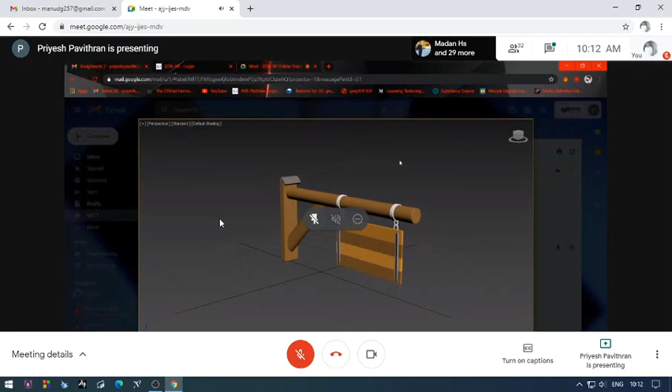Like Jananda, appearance wise it is looking good. The correction I'll suggest is this metal bar which holds the panel should move towards this side, or you can select all this part and squish it a little bit inside. The length is fine. Also this bottom part, I can see it here, I think while doing the loop it might have got some overlapping, but appearance wise it's looking good. Also the color combination you have given is fine.

Okay sir, nice, thank you. I will make one up. Yeah yeah, thank you sir.

Now Mithun. It's looking good, I'll say that at first.

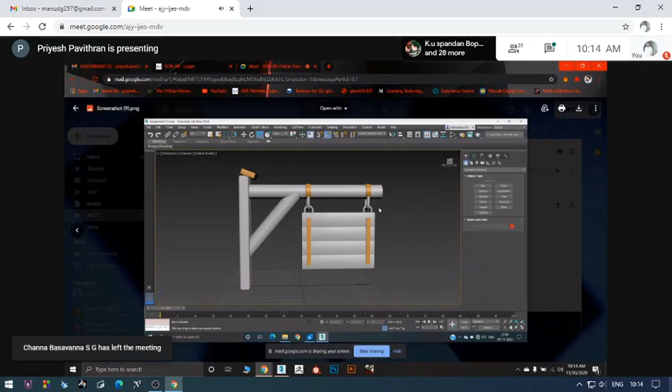Things you have to notice are the dimensions. Like the reference I have given you, this part is not this spacious here, so decrease the space from here to here and keep it somewhere here. The length of this cylinder should be till here, and this complete board should move towards this side. Also the remaining is under the grid, that's fine, the board looks fine, no problem. This holder is a little bit big, reduce the size a little bit smaller, then it will look perfect. Nice work, Mithun.

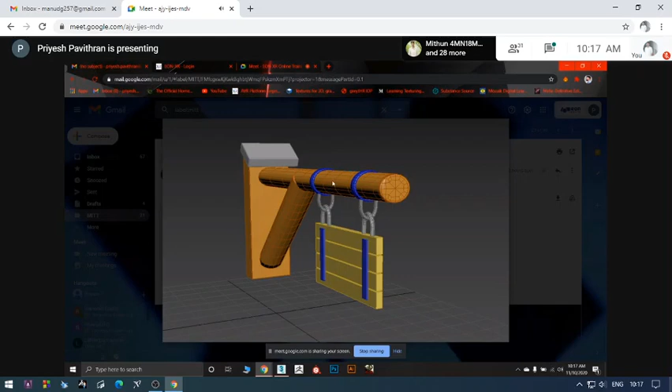Okay, this part is a little bit outside, so move it inside. Reduce the thickness of this plane and this box here. Also the same thing, reduce these holders' size, not much, a little bit. I can't find any chamfer here, apply chamfer, make it curvy at the end for this part. And this looks oval to me, make it circular, just scale it towards the vertical, I mean Z axis, you can scale a little bit, and the proportion is fine. Nice try, Sai Teja.

Now Rahul, wood frame - it's not a wood frame actually, it's a signboard, you can call it an ancient signboard.

This also looking fine to me, except this chamfer you have missed, so chamfer the edges, it will look good then. Also reduce the size of these holders, you can refer the reference itself, compare both your work and the reference, then you will get to know the difference between them, try to work accordingly. You can increase this side's plane size a little bit. Also the holder you have to reduce the size, and this looks okay, this is also fine, and this is too big, this part is too big, reduce that also. The proportion is fine, and the color combination also looks okay. That's all the corrections. Nice try.

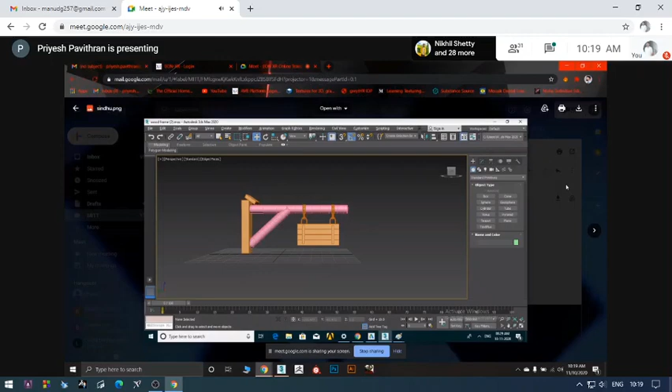So that's all the corrections. Nice try, Sindhushri. No problem at all.

Okay, it's looking fine. This part should be a little bit thicker, and these two parts are a problem because they are outside. So you can use the same slice tool - just drag this part till here and slide it, the same for here also.

So you do that, and you have missed the chamfer part here. For the connectors, you have to apply chamfer here a little bit, for both, or just do for one, and you can copy it here also. Reduce the size of this a little bit, not much, and increase the size of this signboard. Remaining all,

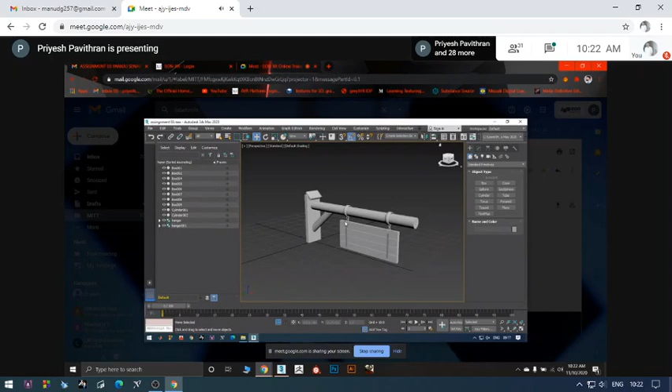And the holders, holders is fine, but very tiny. But it's okay, it's looking fine. Also, this part I can see it came out a little bit. Fix that also. Remaining all, it's looking nice. Nice try, Pankaj.

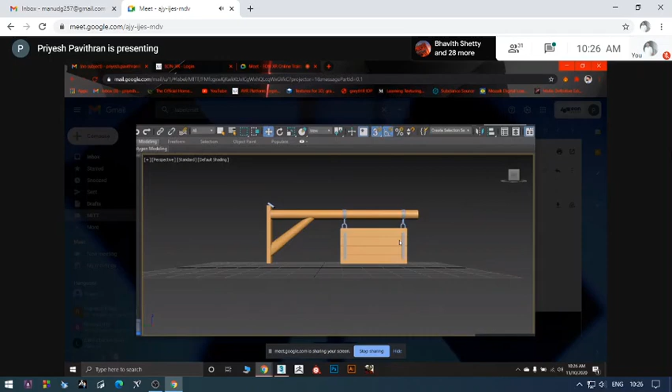Now, Madan, let's see. Okay, appearance wise, it's looking good. The color combination you gave is nice, metallic and wood.

That looks great. Also, some changes here, you have missed the chamfer part. Apply the chamfer, make it a little bit smoother, and also increase the size of this signboard a little bit vertically. Okay, that's all, nothing much in this. Also apply chamfer for this part also because it works, so do that also. I think it's fine. Nice one, Madan.

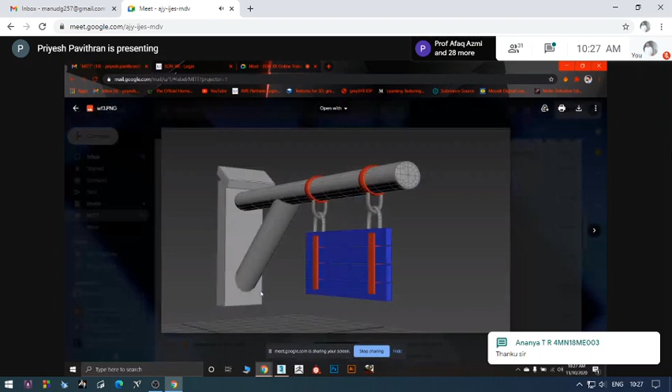Nandan, appearance wise it's looking good, but some problem here with the holders. The holders are very thin. I don't think these holders can just grab the weight of this part. It might break because it's very thin. So just increase the radius, I mean thickness of these holders. Then, remaining the proportion, decrease the distance from here also. Cut this much part and cap it down part.

Here you have done well, here also you've done almost well. It's looking good. Also it might look slightly bulky, but it's not a big deal. Also this chamfer is not looking that great. I think you have selected all sides and chamfered it, that's why it's looking like that. No issues, you can create it again. You can just place one box here and just do the edge, just chamfer the edges from this ring sides. So that's all, nice try, Nandan.

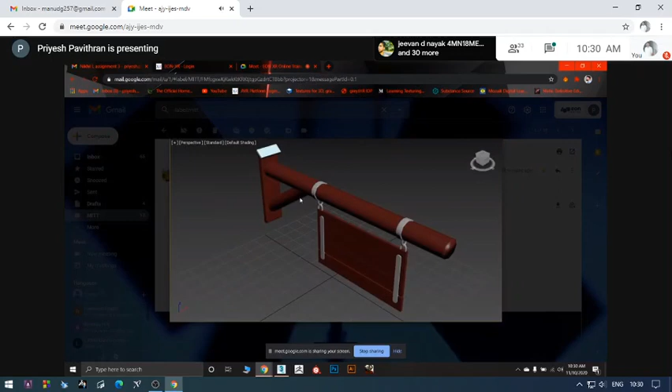It's looking nice. Now I want just major changes for this. You have to move this till here and this till here. Make sure it is parallel, almost middle to this part. This side also we can say it's feasible because once you have stuck it to the wall or something, it won't be an issue. So this proportion wise, it's looking fine. Also, you have sliced it, I guess, yeah, and you have done that chamfer also.

Okay, nice one, what was that? Nikhil, nice one, just work on these changes. Just move this till here and move this till here. The remaining, it's looking fine. Okay, nice work.

Hi Priyesh, Rajneesh this side. Okay, yeah, hi, good morning all. Hi, Priyesh, Rajni, I would like to take your 2 minutes only. Are you all able to now publish your asset on the XR platform? No sir, we can't publish in that matter. Okay, you are still not published, you are facing still the same problem. Yes sir, I'm facing the same problem. Okay, okay, okay, thank you, thank you. Okay Priyesh, now you can continue. Thank you. Okay, thank you, Rajneesh. Yeah.

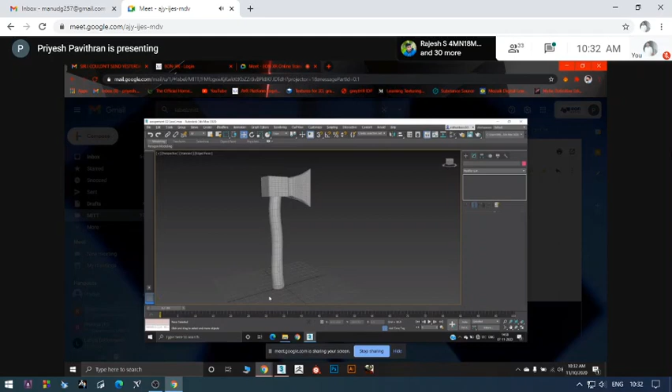Okay, Rajesh, this was yesterday's one, so I'll just open and tell you the suggestions. It looks like a hatchet, like I suggested yesterday also for the students. Just decrease the size of the part, and fix this part because when you smoothened it, it became a little bit overlapping segments, so that's a problem. Just fix this part and make sure your proportion is fine, and you have made it to the grid to the center, it's fine. Okay, nice try, Raj.

Stress, appearance wise it's looking fine, the proportion is fine. Also the holder, same problem, just move it till this side, this one, and this to this side. Same problem, I hope this is not the same model. We have changed the color, but I'll say that it's fine proportion wise.

Then the black color combination, I think for your reference it's fine, but don't become irrelevant for review and all. So right now I can't compare how the edges and all is, but proportion wise it's fine, no issues. Nice try.

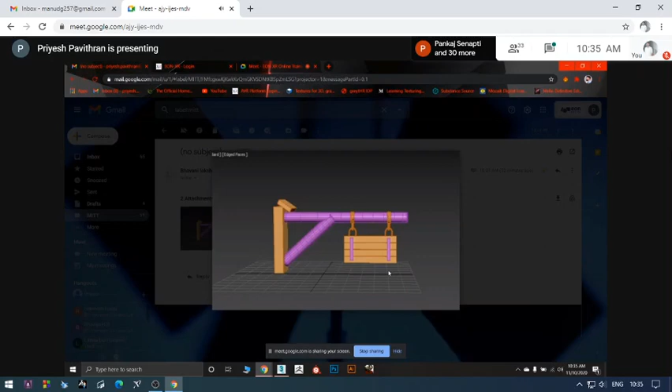The images are a little bit blurry. The changes you have to make: this should be inside also, this one also. Just make this part a little bit less thick and increase the size of the signboard. Do the chamfer part, decrease the size of the holder. Others are fine. Nice try.

Now Kiran. It's looking fine. The same thing, this is very thin, you can increase that also, and the proportion wise it looks okay. You can just drag all this part and scale it vertically. And you did the chamfer also. That is fine. Nice try. Thank you, sir.

Now Trilok. Reference wise, proportion wise, it's fine, but the model is not that great. This part, you have squished this one too much. You can take the same part like this and slice it from here and delete the unwanted faces to make this part. Remaining, proportion wise, this is fine.

Also, the holders look fine, and this is very thin and it is touching the bottom like this. It shouldn't be. You can just scale it to the z-axis a little bit and keep it to the middle of this part. Also, this is not looking that great, so make another box and keep it here, or select this part and scale it towards this direction a little bit, make it more thicker. Remaining is fine, proportion wise. So you can make the changes. Nice try, Trilok.

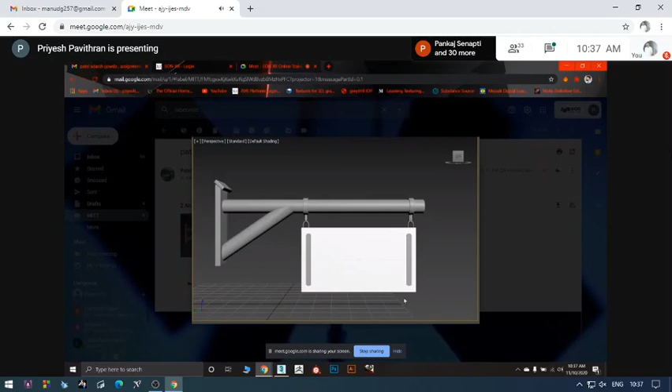Now Patel Adarsh. It's looking good, appearance wise it is looking good. Also the proportion is also fine. You have made this fine, and I think this is too big, this part, so just scale it till here, like this. Just scale it like this. Okay, and you did the chamfer. The holders are also looking fine.

Just make it a little bit less radius because it is going outwards. Actually, it's not touching the wooden part. Remaining, it's looking good. Nice one, Patel Adarsh.

Now Nikhil M. It's looking fine, proportion wise it's looking good. Also you did the chamfer part, and move this part till here and make it look like a symmetrical thing. Just move this part here and this part here. Also this is fine, you have sliced it. Proportion wise and all, it's looking fine. No other comments, just fix these changes. That's it, nice try, Nikhil.

Now Spantan. You have to be aware about the proportions because I can see some issues here with this side. This is like a very thick thing. The radius is too much, so you can decrease that also. I think you have placed a cylinder both sides. It's not looking like a tube.

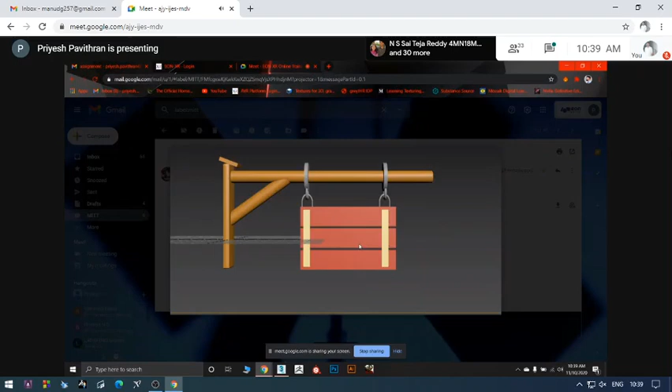Also, this holder should be here somewhere, like move it till here, and on both sides move it to the middle. And you missed the chamfer part for this one, that is also a problem. And you maintain this part like this, and this is looking inside. That's fine. So remaining from this much part, you have to work again. Okay, but nice try.

Now Mohan Kumar. Major problem in this, you have followed the same thing, but some irregularities I can see here. This one, moved a little bit till here and there, okay, you can fix that one. Also this is very tall, so you can cut it from here, make it only this much. And this one you can move to this side a little bit here and make the axis, you can scale. Remaining is fine. Nice try.

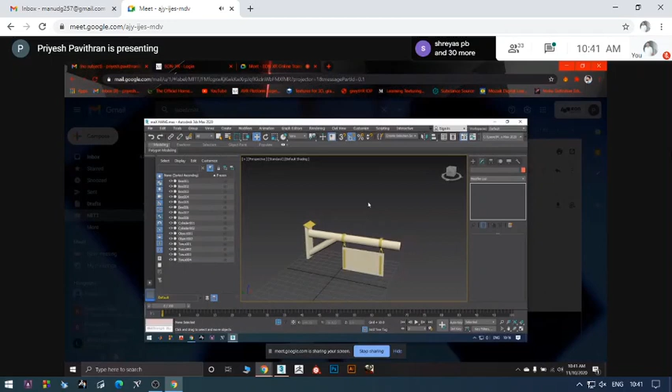Now Jeevan. Proportion wise, color wise, it's looking good, no major issues. Just work on these holders because I can see one is a little bit small and one is bigger, so fix that. Also, chamfer you did, okay, no major issues. Nice try. Same thing, right?

Now Sharad Chandra. So for this, proportion wise, it's fine. Let's say this part you have to make a little bit thicker.

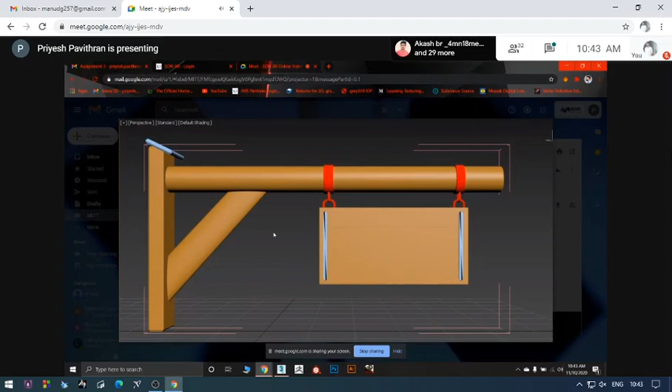So you can put a normal modifier here to these two, and you can just convert this to editable poly. It shouldn't be like that. Use the same cylinder here and slice it. Remaining, it's looking fine. Nice one. And the color, I don't know why, who made this red color. Okay, so it's fine, nice try.

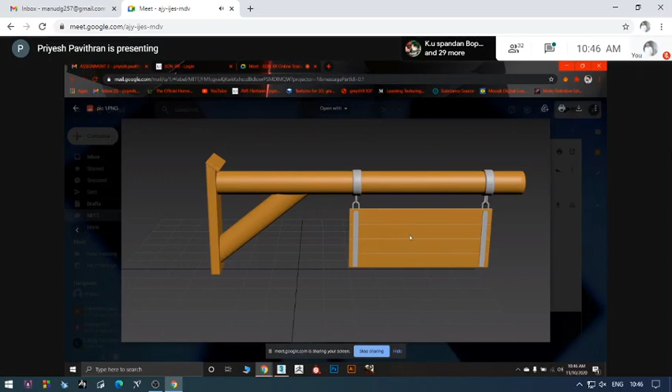Also this looks very rectangular, so decrease that also. You can scale it accordingly. Don't make this part protrude outside this much, so decrease that also. Remaining, it's looking good, no issues. So I think that's all.

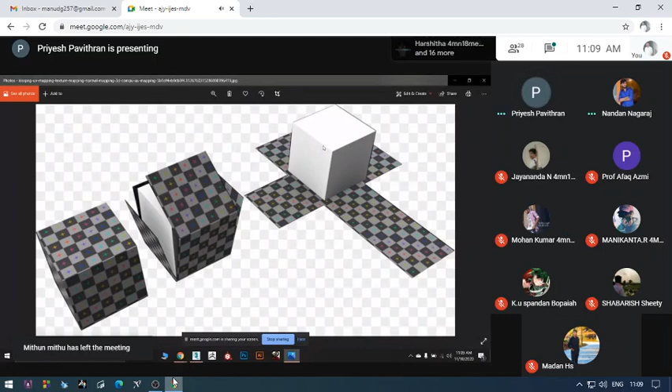So this is used just to create your texture. It's not possible to texture like this - you can't apply texture like this when it is in this state because there are certain view angles and all in 3D. So unwrapping allows us to create a workflow which is dominant to us, like how to create the textures. Like if you want some special textures here, you can paint it here like that. So this image is just for your reference, you'll get an idea like what is unwrapping.

So let's get started. I'm creating a box here. Let it be the size of 20, 20, and 20, so all the sides are equal now. Go to top view, arrange it to middle. Okay, now...

What you can do is just convert this model to editable poly. Now press X for your modifier list, now type unwrap - unwrap, so you will get unwrap UVW. Select that. Now you will get an option, Windows, here.

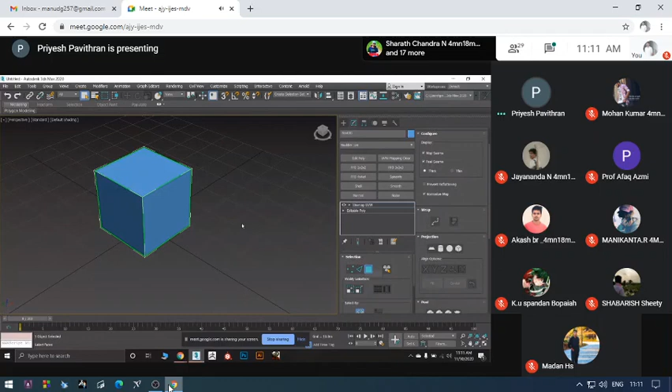Here you'll get vertex, edge, and face - like the same editable poly option, you'll get vertex, edge, and face, which is polygon. It's not like that - you can move your model from here, it is not possible, because this is a texturing window which you have to unwrap your model. Okay, so these are the basic things about unwrap.

So now I'm going to introduce you to some tools which are useful to unwrap a model. It is necessary to unwrap every model like before, type...

Now I'm going to introduce you to some tools which are necessary to unwrap. Go to your face mode, then only it will get enabled.

So these are the projections: planar map projection, cylindrical map projection, spherical map, and box map. Most of the times your shapes won't be in these four shapes, I mean your object won't be in these four shapes.

So this time you need to unwrap the model. I'm going to show you what these projections do. So let's open the UV editor. Now I have opened the UV editor. You can see this is your box.

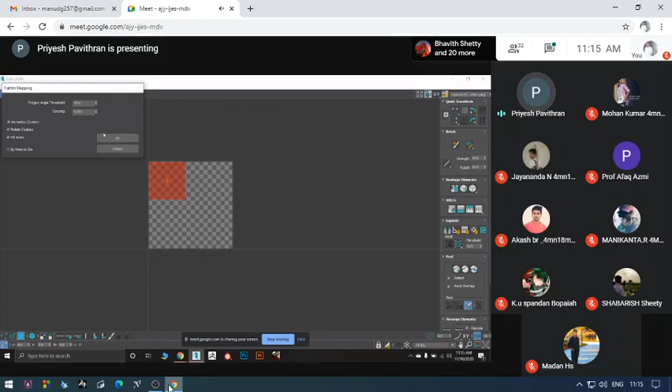So I'm going to select all the box, and what I'll do is mapping, flatten map. Now you will get some controls here. Don't do anything on that, just uncheck rotate clusters. Now press OK.

Now what happened is your model has been completely unwrapped. For your reference, you can just select this part, which is this. Now this part, which comes here. Now this, now this, and this.

Now you got a control which you can create an image and you can place your tile here and there, like anything. Here one red color, imagine like that, you can just keep it there. And here one blue color, if you want this side to be blue, you can keep it on the blue.

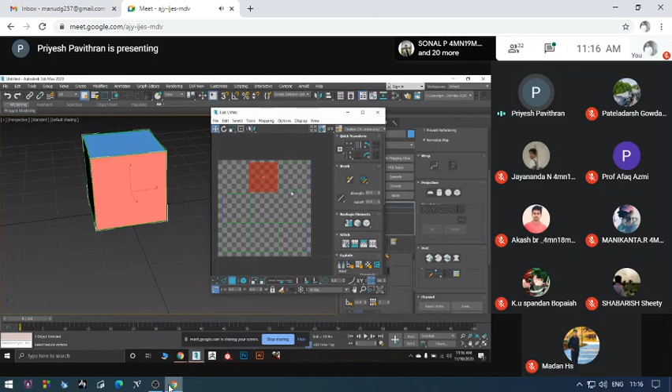So this is your image window which should be in 1K resolution, which means 1024 by 1024. Please note it down, for the texture you always pick a resolution of 1024 by 1024.

So these are the very basics of unwrapping. Now we have several tools for unwrap. I'm gonna do that in front of you so you will get an idea of what it really does. This part is just to make you understand how the unwrapping works.

Also, I'm gonna introduce you to the stitch tool, which is, you can select one edge. Now if you want to unwrap your model like I showed you in one image before, like everything stitched, so if you want to make your unwrap panel like that, just select the edge. You have a stitch to target option, sorry, go to custom stitch.

This one again here, now stitch one more here. Select this part, it got stitched. This also, now here you can see the stitch options. Now you can stitch, so it became a T shape.

Okay, now press R, go here. Select all your faces, scale it down, and W. Keep it here.

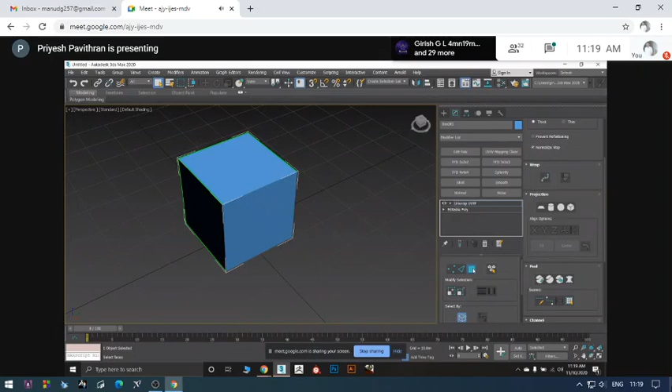So what I'm gonna do is take our previous model, like yesterday's model, and unwrap that in front of you. Concentrate here, this is really important.

Now I will create a folder called Day 5. Now Day 4, this was your model, so I'm gonna take that, drag and drop here. Now open, you can open your previous file like this also. Minimize.

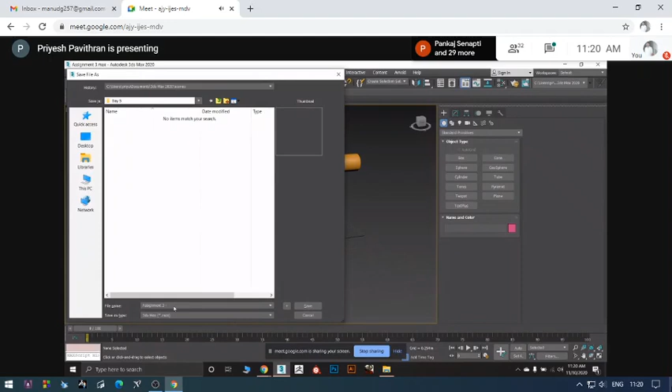So this is a cylindrical part which can be unwrapped with cylindrical mapping. I'm going to select this part individually. Now I'll press X, unwrap, UVW. Now isolate the part.

You're finding a seam here, which is like defaultly applied by 3ds Max. Actually, I don't want that. So what I'm going to do is select all my model, convert to editable poly.

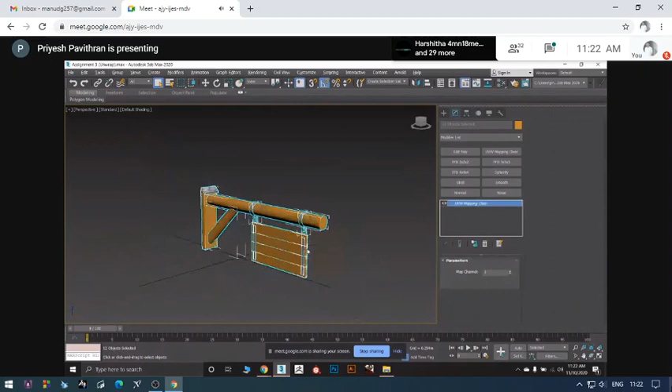Now press X, clear, okay, UVW mapping clear, this one. So your all default unwrap will be gone. Right click, convert to editable poly. So your model is new right now.

Now you can customize and apply your own unwrap here. Also one more thing, Control A, go to this settings window, go down. You can see UVW remove here also. You can use that as well, but don't go till there. It's better to select all, press X, clear unwrap, or you can type UVW, then this option will come.

Now I'm going to clear my UVW mapping, select this, right click, convert to editable poly. So every time when you want to model something, do this. This is important because otherwise 3ds Max will put a default unwrap to your model.

That won't look good. Now again select all, go to the settings, you'll find the reset XForm option. Before texturing, you have to do this because you have to clear your history and change your mapping, you have to reset your hierarchy as well. So just reset XForm here.

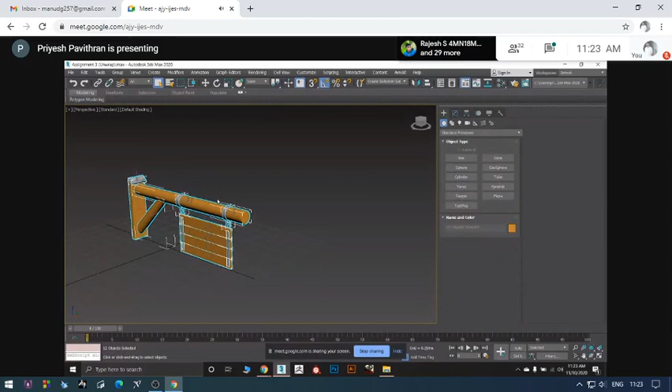So I'm gonna avoid this, and all three. Going to make unwrap these three parts for this part because all these parts are duplicate. So I'm gonna select that, avoid, hide that first, hide selection. Now it got hidden. Now select this part, press X,

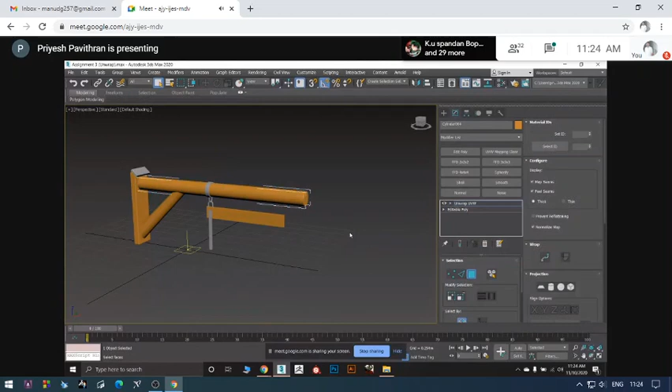unwrap, UVW. Now your unwrapped material has been opened. Now there's an important thing to this mode. When you apply unwrap UVW modifier to your model, your save won't work actually. Your control S save will not work.

So keep that in mind. You have to go here and save your work. When you press Control S, it will never work. So for the Control S, there's another shortcut that will turn on. So always go to File and Save when you are in Unwrap UVW modifier.

Now let's see. Convert to editable poly once again. Now I'll select this. I will isolate. Now I'll put unwrap. Sorry, I didn't select this.

Unwrap UVW. So you all can see this is a cylindrical shape, so cylindrical map might work for this one. Now here for your reference, there's another helper point which is showing you how to control this part. So you have access also here.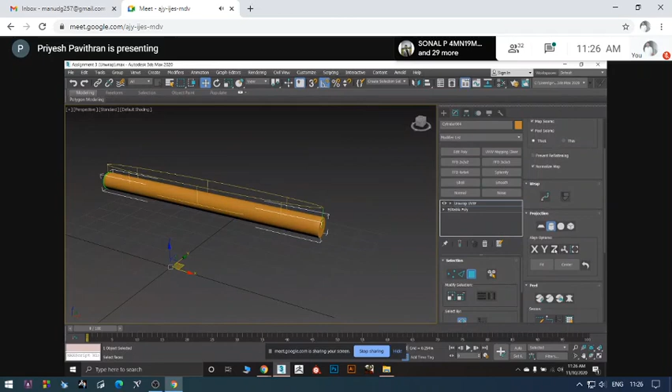You can rotate this like this, like this. No changes, you are getting it here. So in this case, turn off the cylindrical map.

Switch mode. Turn on your wireframe, which is F4. Now you have an option here: convert edge selection to seams. So I'm gonna open my model in two ways. I will do the seams from outside.

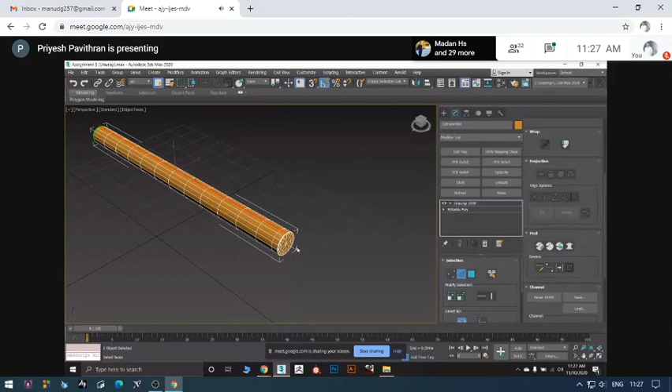Select the edges like this: 6, 7, 8, 9, 10, 11, 12. I will select this also, which became a line till here, right? So I guess you also made the model in the same way, so you can follow the same unwrap tricks here also.

So I have selected this much edges, and what I do is convert the edge selection to seams. Now click that. Your edge now became a seam. Now go to this border, just click and you can loop the edges. Once again, this is loop and this is ring. Now select this part and loop the edges. Again, convert edge selection to seams.

Now go to your face part, Control A, select all the faces. Now what you'll do is quick peel.

So concentrate on this quick peel part, and convert the edge selection to seams. These two are very important. You are going to use these two tools now and in the future also to unwrap.

So after converting this to seams, go to face, Control A. Now all the sides have been selected. Just press quick peel. Now your UV controls have been opened, the UV editor.

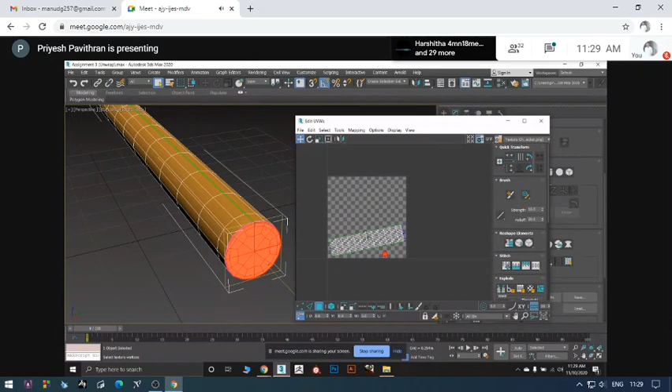So here you can see this is this part and this is this one. The lines you're seeing here is from when I opened it, so it got opened like this. The difference I will show you is I will keep it here. Always keep your UV at 90 degrees, horizontally or vertically. So I'm gonna keep this horizontally. Here also your angle points will work.

If you want to turn this to your preference, you can turn off the angular snap. Control Z. Now if you want angle snap, you can use the angle snap also, then it will rotate in 5 degree increments. Now I'm gonna turn off my angle snap from here.

Now I will keep the UV in this part, meaning 90 degrees horizontally. I'm gonna move this. Press the move button, or you can press W for the shortcut. Move it here. This part also, move it here and keep it close. If you want to scale it down, you can do that also.

Select all, click here or press R. Now W, E, R, same thing - move, rotate and scale. I'm gonna scale this a little bit here, and I will keep it here, and I'll select this much part, and keep it here.

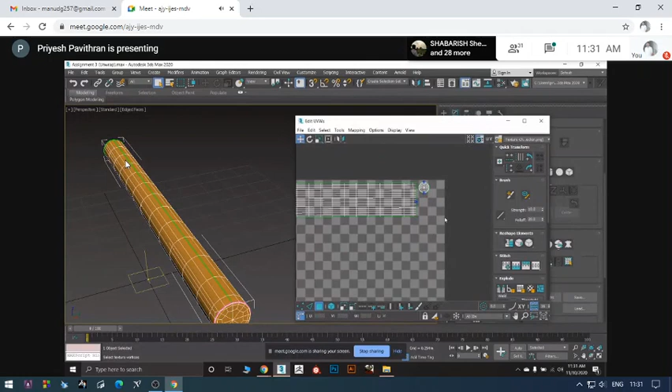You can select the model by double clicking the UV, like one, two, one, two, like that. Click, double click, then the entire UV will be selected. If you click once, only one face will be selected. So it will move like this. Control Z, double click, move it somewhere here and keep it neat like this.

I understood that you guys are confused a little bit, so I'm gonna turn off the polygon and copy like this, shift and hold, and I'll show you the difference between unwrapped and not unwrapped model. These two are the same shapes, so this part I will keep to red, which denotes this is unwrapped and this is not unwrapped. So I'm gonna show you the changes.

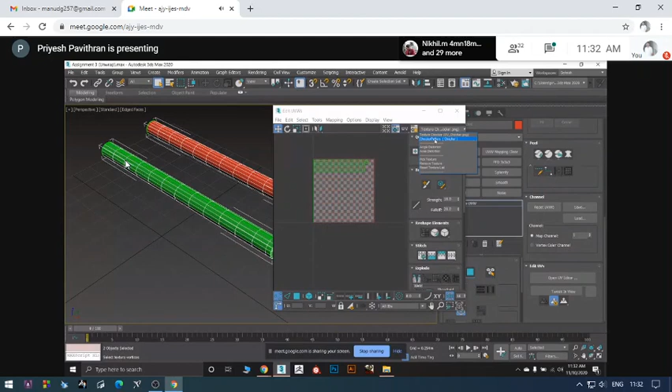Select both of the models. X, unwrap UVW. Now go to your UV editor, and here you can see your texture sheet details at the very top, upon the transformation you can see this. Click this arrow, there's a checker pattern, just apply that and see.

Now turn the wireframe off. You can see the difference between these two models. This is not unwrapped and this is unwrapped. In the unwrapped one you can see every side, the pattern is properly arranged. Everything is in square shape.

So I'm gonna go to here, and see how badly it is packed. You can see that. So before texturing, you have to make sure to apply the checker pattern and see if all sides are in square shapes, because we don't want any stretchy sides.

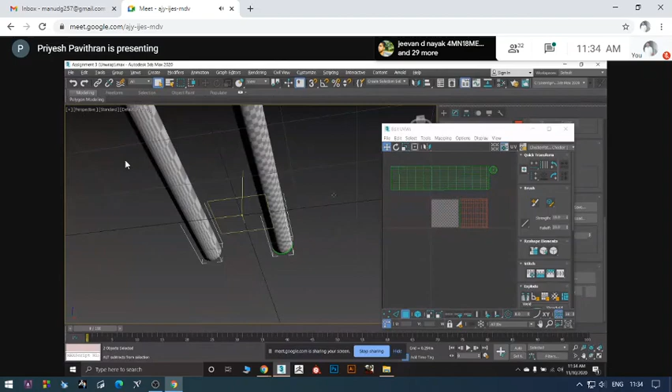I'm gonna increase the size a little bit and then move it here. Now you can see everything looks perfect. Everything is in square shape only. Now here everything is stretched because of this UV.

Now you can try, but there's no other way, we have to unwrap this. So unwrapping is really important. Convert to editable poly.

Now this part has been unwrapped properly and we are going to move to this. This is a shape before that, this is a box shape. There's a different trick to unwrap a box model.

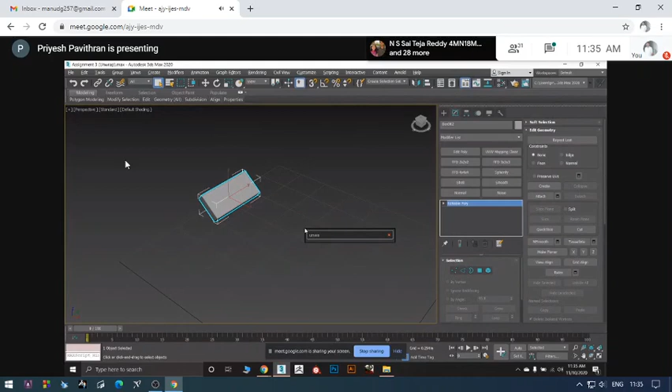Okay, select this box, isolate it, unwrap UVW. We have already cleared all the models before unwrapping. So for this also I'm going to use the same technique - wherever the loops are, select the loops first, then cut it from somewhere and you can open it.

So I will select the edge tool here, like this, or just select this, press loop so it got selected.

Convert edge selection to seams. Select the down loop, convert edge to seams. Okay, now here we can see now edges has been seamed.

So let's see how it looks after unwrapping. Select the face, Control A, quick peel. Now this part looks perfect.

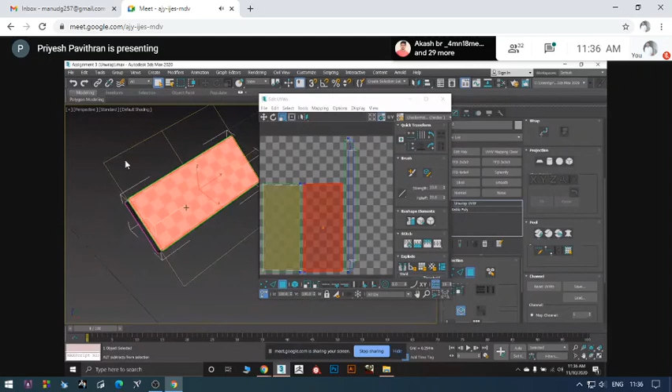Open your checker pattern and see, this part looks perfect, perfect square it is. Okay, so we are not going to do anything on this one. Select all these and move here.

So what I'm gonna do is go to my edge part, select this edge, a single edge or multiple edge, that's up to you. So I'm gonna select one from here and one from here, which will match the proportion, and I'll do again.

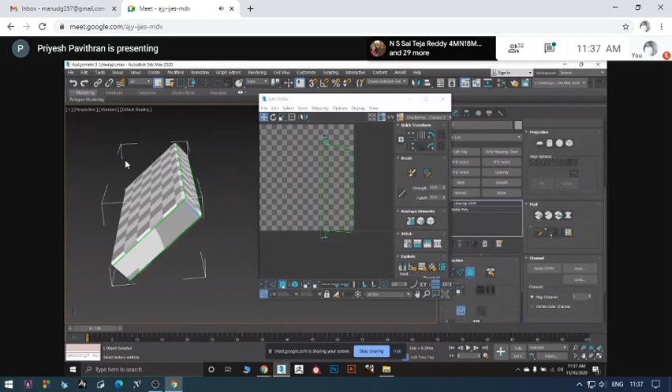Convert the edge selection to seams. Do that. Go to the face mode, double click this part. Same option here or here as well. Here also it is there.

Go down, it's up to you which part you're using, it's entirely up to you. From here also you can use the quick peel, and here also you can do that. So I'm gonna use it from here. Quick peel. Now it became proper.

Now still you can see this part has been rotated and not looking properly. So double click E for rotate. Just arrange this to 90 degrees horizontally or vertically. I'm keeping it as vertically.

Now select all the models, just drag down. You can see arrange elements, it's helpful to arrange your UV. Just click this part, everything got arranged properly.

Now, if you want your checker pattern to look common to each other, just press R to increase the UV size. Always keep in mind, this is only for reference. Otherwise, don't make your UVs this much bigger. UV should be fitting in this checker part, this page it should be fitting.

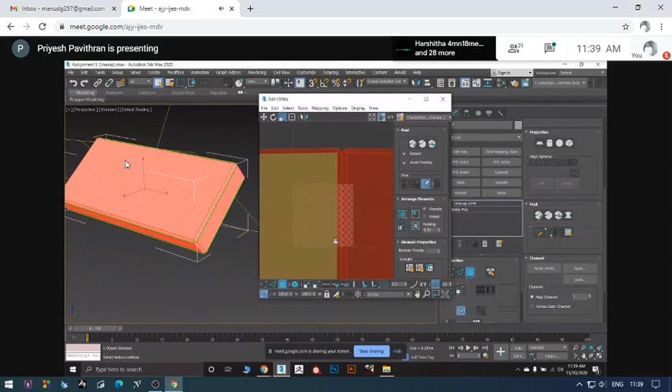All the parts are looking good and nicely packed. So reduce the size and just keep it somewhere here. Okay, now close this, just turn off the polygon part.

Select this, just change the color to green or something, so you'll get an idea that it is already unwrapped. Convert to editable poly. So these two parts we have unwrapped, and we're going to follow the same process for this one also, so the history has been cleared like previously for this one also.

Now select, unwrap UVW. Select the edges, turn on the wireframe, select this part and this part.

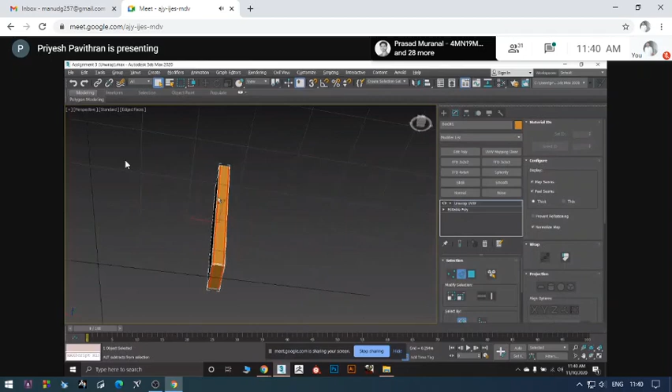Go to edges, loops. Now click loops. Now you can see all the loops has been selected. Now for the same thing I'm doing here also, I'm gonna select this and this part.

I'll go to my conversion tool, now convert edge selection to seams. Do that, go to the face mode, Control A, now quick peel. Your UVs has been peeled properly.

Now you can see some triangles are here, okay, so that is this part. This part is not properly peeled. You can try peeling it again, it's not working, so you have an option called relax here.

Relax. So click and hold, go to settings, there's an amount here. Just select the amount one. Now start relax. Okay, now it got relaxed. Now close this window.

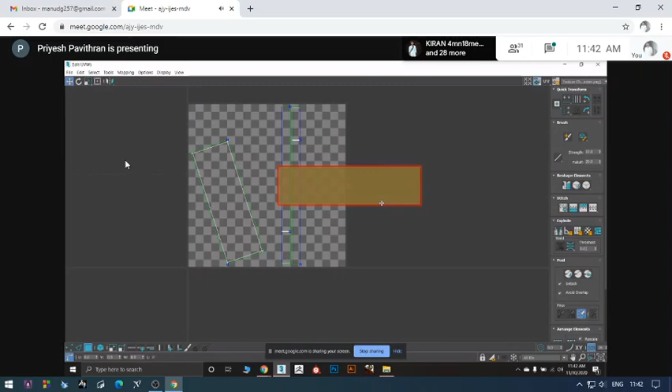I'm turning on my angular snap. Okay, you can maximize and minimize from here also, but keep it like this only, so you will get an idea of how your model looks from here.

So rotate it to 90 degrees. Here also make it 90. It's not getting to 90, so turn off the angle snap. Make it exact 90 degrees. Okay, now select the complete model and peel it again.

Now it got properly done. Press the button and you can see all the sides are packed properly. A little bit triangular, you can see, no issues. Select it.

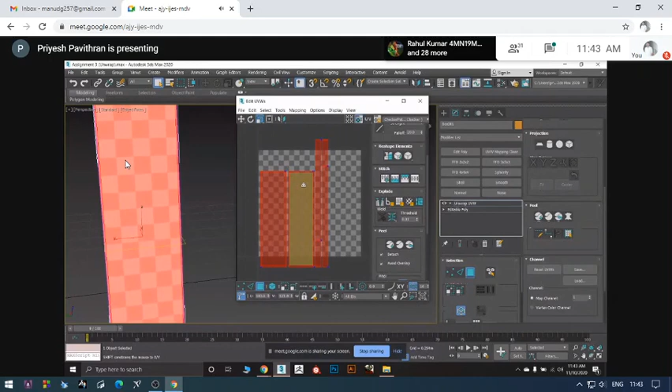Go to the scale window, hold shift and drag it a little bit down or up to make it look like a square. This is not necessary, you can keep it like this also. I have shown you just for your reference.

Now this part also has been properly unwrapped. Close the window again, select the model, convert to editable poly. Change the color to green because it is already unwrapped. This is not important, okay, changing the color, I'm just showing it for your reference.

Now, this is a cylindrical part. Maybe cylindrical map will work on this, but we are not going to do that. There's a much more easy way for that that I already have shown you - convert the edge to seams. That's the best part. I always use that part only while modeling because most of the projection maps will make you rework. Why such pain? I'll suggest you use this workflow only.

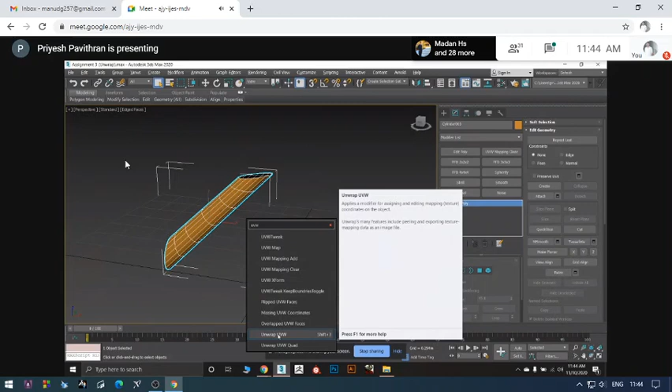So select this one, isolate, press X, go to unwrap UVW, select that. Now here also you can see some helping video showing like F1 and how it works.

This part is not capped, so it already has seams added. The green color is seamed, so you don't have to do anything to this part. So to unwrap this part will be very easy for you.

Select the edge, select the middle of this part like this, and this. Go down. Now convert edge selection to seams. Click that. A seam has been created. Press polygon, Control A. Now you can quick peel.

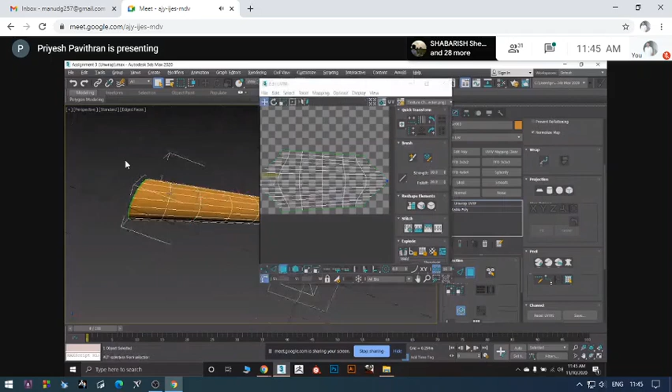See how easily it is peeled. You can see some deformation here, because of this part. Just imagine how it looks when you make a paper using this. Okay, so it shows like that.

I will show once again. See, this is this part, and all are following like here and here. So a little bit deformation you can see there.

Close the window, go down again, peel. So it has been done properly in the first place itself, so you are not feeling any changes. Turn on the checker pattern and see if it is proper. See, it is properly arranged from the first time itself.

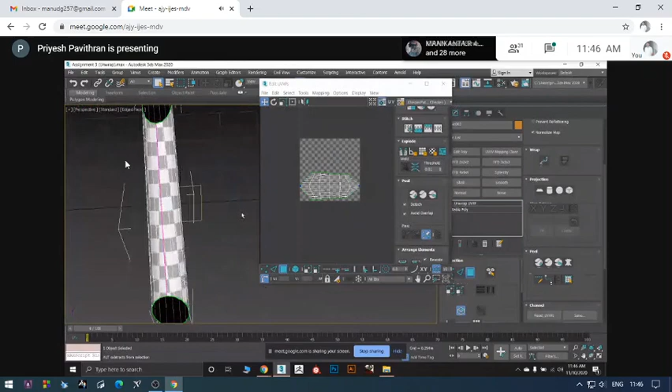Okay, now keep it aside, close the window, turn off face mode, select the model, convert to editable poly. Do this much part - this three parts we have to do.

Isolate the model, select the model, press X, unwrap UVW. Actually, this unwrapping part will be a little bit complicated, but don't worry. When you do it, you will get it. So don't worry about that.

So again, I have opened this. Select the edge. Now you can see we have a complicated kind of wireframe here, so you will be confused how to select that. Don't get confused - the tightened edges will be the best thing to select.

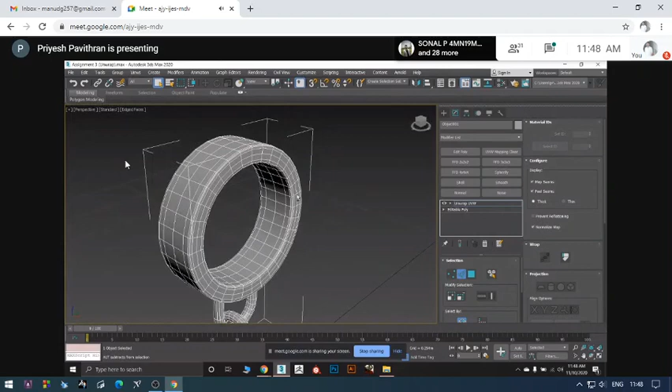Select the edge mode, select this, this, same for this part also, this side also. So no - the tightened edges means the very end.

You can see this part is at the very end, so I'm gonna select this. Go here, select this. Do for the opposite side also - select this and this. Now loop your edges. It got selected everywhere.

Now when you peel this model, you can see all the cylindrical shapes are attached to each other except this part. This part will get an extra opening, so you don't have to do anything for that.

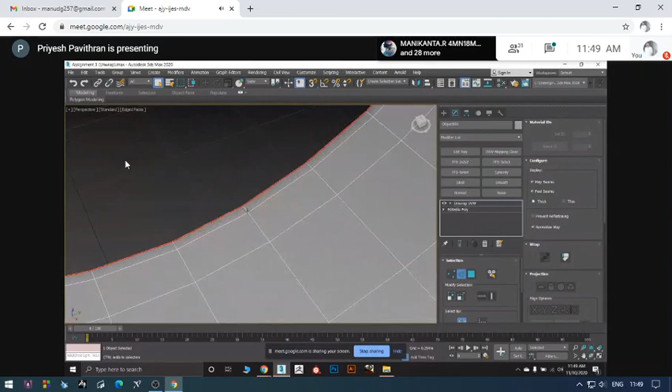Just select from this seam to here - 3, 5, 6. This part also, anywhere you can select, it's up to you, but select somewhere which is not visible. Now I selected that part because it is inside this part. So do the same for that also.

So this part will be less visible, so I'm selecting this part in the outer section. Again, I have selected this much. Now go down, convert edge selection to seams, click that. Now you can see all your seams - your edge has been converted to seams, however you want.

Now go to polygon part. You can't press Ctrl A here because it will select this part also. There's an easy way to select this only. Select the face, you can see. Now select that - so this part has been selected separately.

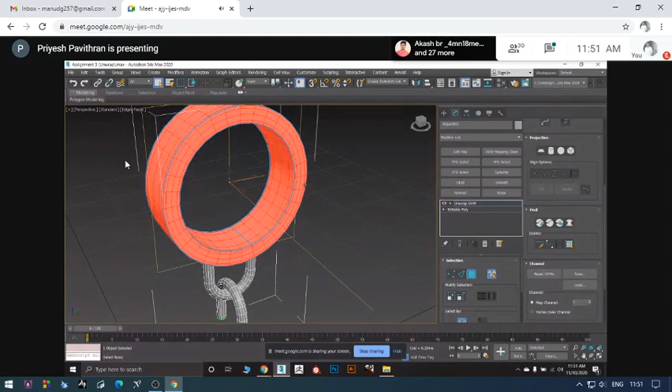Much more easier way, there is one more - you can see select by element UV toggle. When you toggle it on, when you select a face, all the elements will be selected. Now turn it off and select one face - same like the editable poly session you have seen. Now I'm gonna turn it on, select the ring.

I'm gonna peel it. Now you can see some irregularities and deformation has happened that can be fixed using a relax tool. See this - this is how a not-unwrapped model UV will look, properly nothing. So here you can see it got arranged a little bit except this part.

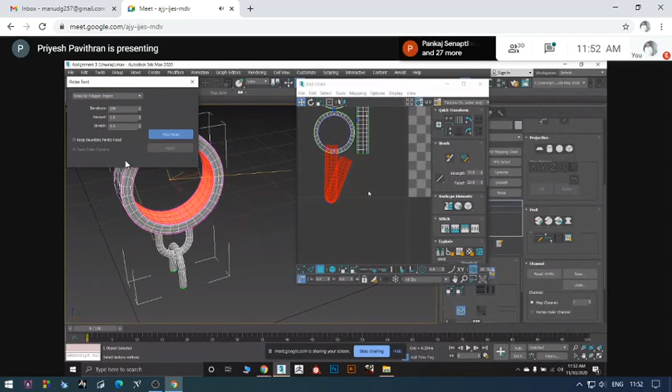Now it's like earphones got tangled. Because of that, start relax again - it is processing. Same thing happens when your earphones get tangled, right? You have to wait some time to untangle them. Same thing here, you have to wait for some time. If it is not working, try another way. You can see it is getting processed.

Wait for some time. It's taking too much time, so stop, relax, try peeling it again. Now it happened - it's because we have loosened all the attached shapes using this relax tool. Then try peeling it, it will work.

Now I'll press E to make it a 90-degree vertical. Let it be like that only. Now I have set it to this degree. Select all this part, don't select this one, just select the ring part. Go down, arrange the model. Now it came here.

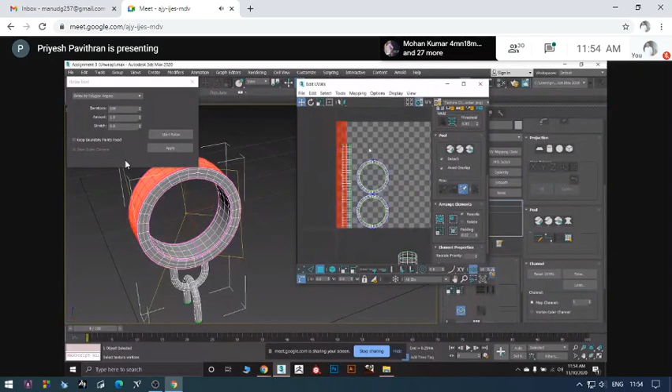You can press W, double click the UV, you can place it somewhere here. I'll say keep all the respected UVs together, but make sure it is not getting overlapped like this. Then you will face problems while texturing. When you apply texture for this part, it will affect this much part of the other object also, so it's a problem. Always keep this in mind - do not overlap the UV.

Just keep it close, keep a little bit of distance to each other like this, and double click, move this side. Always keep a gap like this. Don't let your UV overlap. Now I moved this here, closed my window. Again, I'm going to...

Now this part is a metal part. So what I'll do is select, turn off the element - sorry, select here and press Alt X for the X-ray. Now you can see the inside. Yeah, it got properly selected.

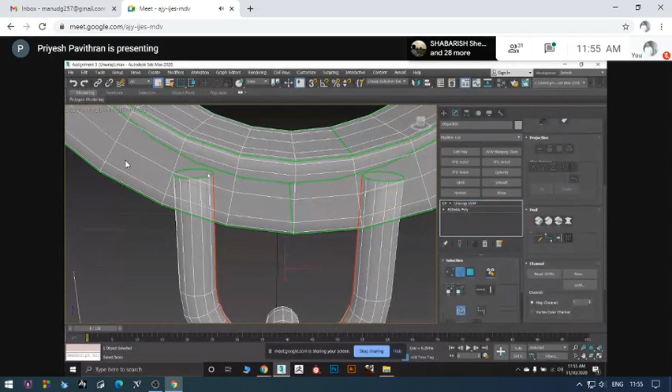Just because this part has been opened, it selected a loop. Now Alt X, turn off your wireframe, means your X-ray mode. Again select this and loop, or else you can select one edge from here, one loop edge, not ring. For this also I have selected. Now press loop - now it got properly looped.

Go down, convert your edge selection to seams. Now it has been done. Again go to the face mode, select this element, select these two parts. Now go to quick peel.

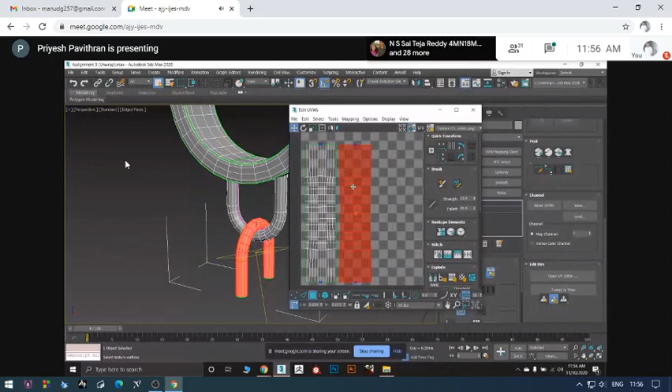Now you can see both things have been relaxed and properly peeled, but keep both of them in one direction, either horizontally or vertically. I turn on my angle snap. Move here. Okay, it is properly packed. Keep it somewhere here, make it a little bit less compared to this.

This shape is small, so decrease the size. Keep it here. Okay, now you can turn on your checker pattern. Select all, increase the size. You can see everything is properly squared.

It is done. Control Z. Now keep it somewhere here. Close the polygon. Convert to editable poly. Change the color to green because it is already unwrapped. Isolate - now this much part has been properly unwrapped. Now only these...

So someone is muting me.

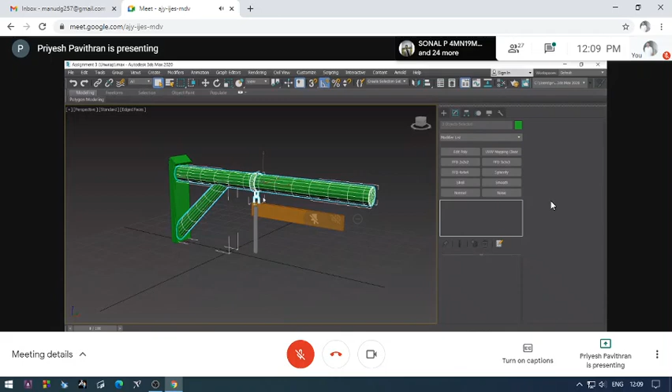Will be straightened after unwrapping. So we all know that we cannot paint the model directly like this, so the only option is we have to create a sheet and apply the texture for that. There's a difference between material and texture that I will explain tomorrow, because tomorrow we'll be having texturing and shadow management sessions. So we'll continue with this now.

So this much part we have unwrapped already, so now only two are remaining. But after unwrapping, I'll not copy any of the part right now - that I will do tomorrow. So the same way we have unwrapped this part, we'll unwrap this also.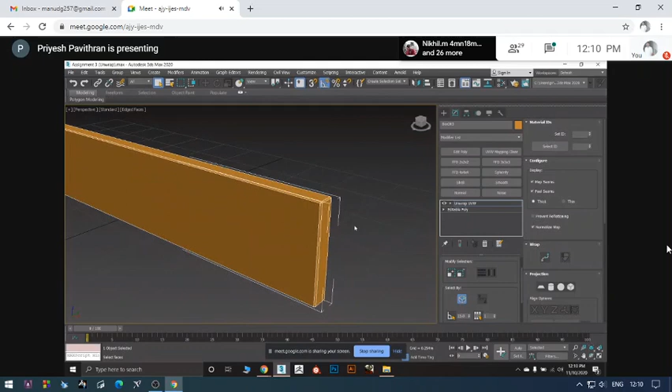Select this. So I'm going to apply Unwrap UVW. Now if it is just a box which doesn't contain any chamfer, we can select and we have an easy option - go to the UV Editor, like I have shown you.

Do flatten mapping from here. But that is not fine because we have these chamfered edges here, so because of that it is not a good thing to apply flatten mapping straightly. If your model is just a box which doesn't contain any chamfer, we can do that.

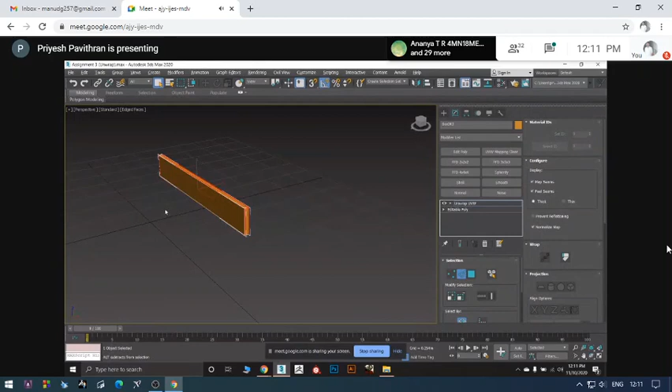So here also we have to follow the same thing. Go to the edge, select this, also the edge parallel to this. Now make it loop. Now what I'll do is I will select this also and same to the opposite, this one also. How you are cutting it, it's up to you. Someone will put the cut here, here, and here. It is fine, no issues. But make sure your unwrapping seams are in the loop.

How you cut the model, it's up to you. If you want to cut it like this, select this and put the loop here. Again, if you want to select here and put the loop here and you're cutting it here, that is also fine, no issues. But I suggest you to follow this pattern, so your workload will be less.

So select this and this, and I will loop it, convert to seams again for this also. And like I said, this part also I have converted that to seams.

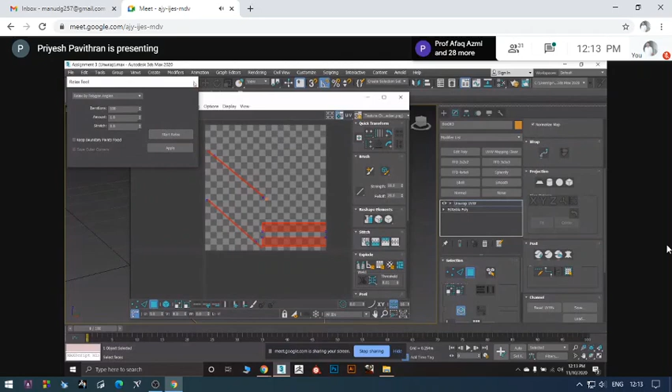Now go to the face, select all, Control A, go to the quick peel option, which is already here. Now quick peel. Now you can see your model has been unwrapped with a small amount of deformation that can be fixed in relax. Press and hold relax, go to the settings, amount, type 1, start relaxing. Stop relax, close the relax tool.

Now you can see all the UVs have been relaxed properly. Double click, arrange it horizontally or vertically. It's up to you. If this part is horizontal, you have to keep this part also horizontal. Otherwise, your texture pattern will not look good.

Now turn off this one. Now make it a perfect 90-degree manually. For this part also, I have turned it to 90-degree. Select all, go down, arrange UV element. Now everything packed properly. Press W to move, keep it somewhere here, close it.

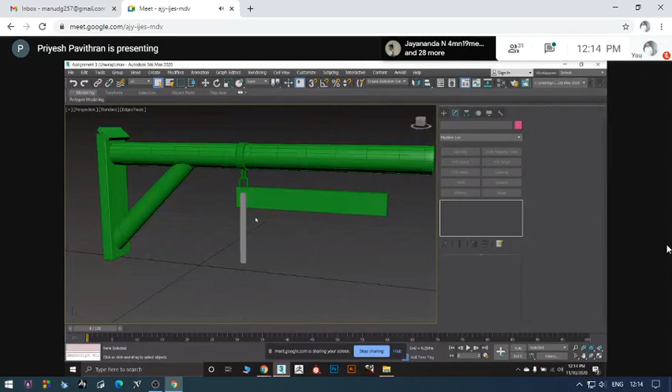Now select your model, convert to editable poly and change the color to green. This is not that important, this is just for my reference to understand which part is unwrapped. And for this part also, we'll do the same.

Select the model, isolate, X, unwrap, UVW. I'm gonna take the same thing, edge, click here, loop is not working, you can see this. So there's another option for this. If your loop is not getting selected, you can directly go to the face. Now select the face.

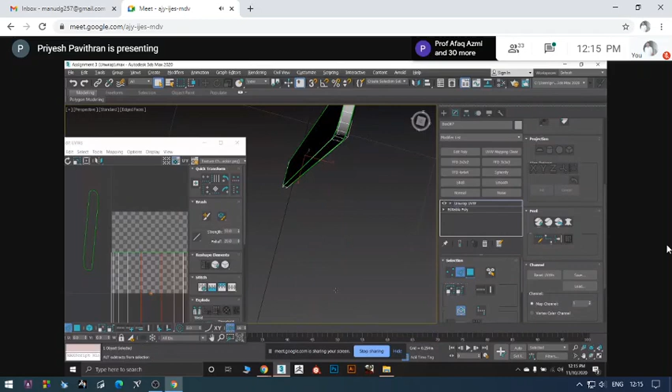Go down, quick peel. Now one face has been peeled, but with the deformation that we have to apply relax. Move the window here, go to the edge. Now if I'm only cutting in just one, it will not look good. So what I'll do is I'll just apply one edge here and I select one more edge from this side, so the measurement should be same. It's not mandatory to keep the measurement of the UV the same, just to save your UV space, you are doing this.

Now convert the edge to seams. Press this. Go to the face mode. Control A. Don't select this part, or just unselect from here, because it is already unwrapped.

Go here. Now peel. Now you can see your peel has been done, but with some deformation. Peel it again, it got worked. When I was peeling it first, it appeared like this, and I peeled it again, so it came proper. Now you can see this part is not looking that great, so hold the relax button, go to settings, just change the number to 1, apply relax. It got perfectly set.

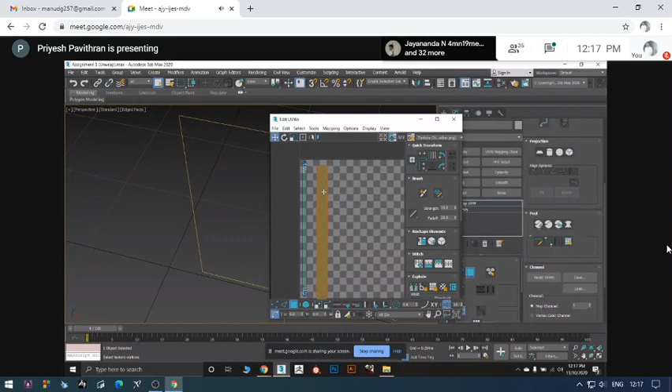Now press E and rotate, make it 90-degree. Keep it somewhere close to this, but don't make it overlapped. Okay, now done.

Now for texturing, what we'll do is we'll texture this part first and we'll copy it here, so we'll get the same object here and there. Now keep it in mind, I didn't unwrap this much part because we already have a duplicate object of this here, so it is not necessary to unwrap this and this again.

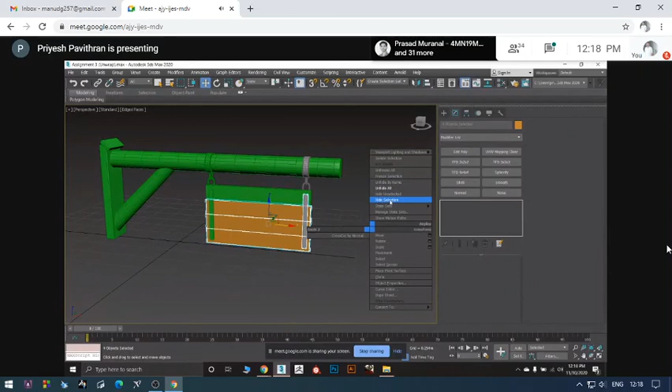So you can just unwrap one and you can copy it here, so it will make your workload easy. As of now, I'm just hiding it, you guys also do the same. Once you have created the texture, you can copy it here, then you can delete this part also.

So this much will be your assignment for tomorrow.

So you have to unwrap this much part and send me the max file tomorrow, because I can't validate by looking at a screenshot. Only when I click unwrap through the model can I verify your assignment. So send me the max file tomorrow. Okay.

Keep the same proportion, like I have told many changes for you guys. So try to do the changes. Or if it's not happening, just unwrap it in that way itself. Most of the people did it very well, so you can just straightly unwrap.

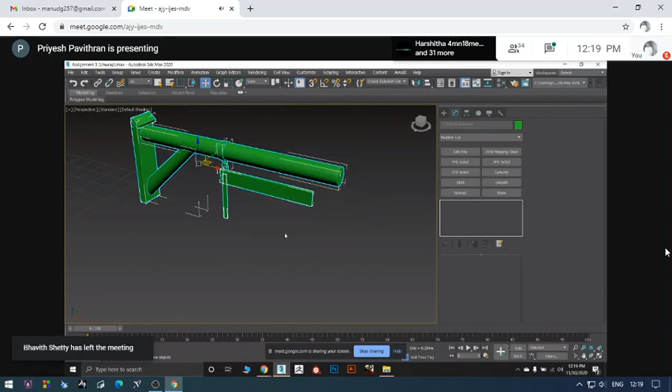Before unwrapping, one more thing. Let me copy this here for reference. Before unwrapping, select the model, whole model, X clear, UVW mapping clear, apply this one first, then go to the settings page, reset X form, reset selected. Now come here again, you can see it is here. Now right click, convert to editable, and only then start unwrapping the model. Once again I'll show you: just select the model, press X, unwrap UVW. Okay, this is the unwrapping procedure.

First, clear the unwrapper, the default unwrapper which the previous Max file already has assigned to you, using X form, which makes your model brand new, I'll say. So select one by one, apply the unwrapper, and fix the model.

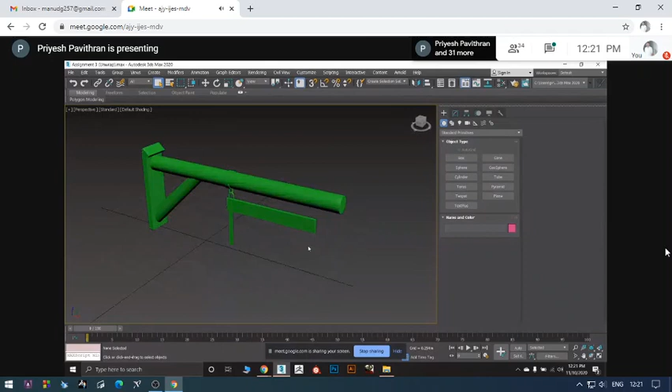After that, tomorrow we'll arrange the model and also set the shaders and texture it. So this much will be our assignment tomorrow. Select all these parts, hide the unwanted ones, and unwrap this much. Send me the 3ds Max file tomorrow.

So if anyone has a doubt -- okay, so I have applied material to my model. How do I unselect the material? You have applied material and you want to clear it. It's very easy. Now, this is the box. Now the material editor, material here -- so I accidentally set a material to this one and I want it removed.

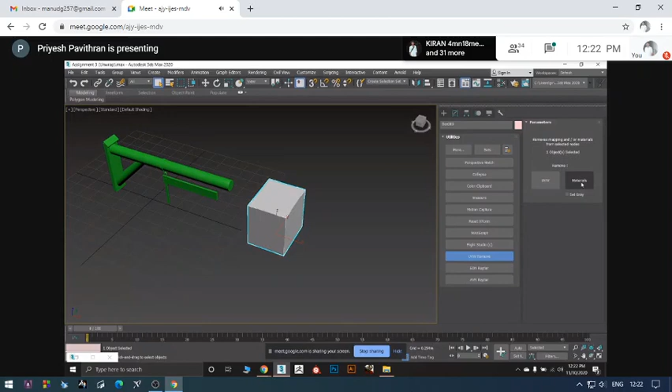So you have another option called clear material. I don't think it's here. So select this model, go to the settings, utilities actually, and you have a UVW remove here. Select the UVW remove. Now you have two options, which is clear UVW and clear materials. Clear your material from here. Now it came back to the normal state.

I think this option won't be there unless you set it. The same way you set Eon Raptor and AVR Raptor from here, right, from the configure button settings -- you guys have to set that option from here. Here I have already set it, so it's coming here. So I will show you.

Now I have an empty space. You guys can increase the space from here. Total buttons, you can make it 12, 15, 20, up to you. I'll suggest 11. That means we'll get an additional 3 columns for Eon Raptor and AVR Raptor, which you guys have already set. Now we have an empty space here.

Now go down, you can see some items here. You can see UVW remove at the very last. Click this, drag and put it here, press OK. After that, you will get this option here. If you're finding more difficulty, I'll show you a solution.

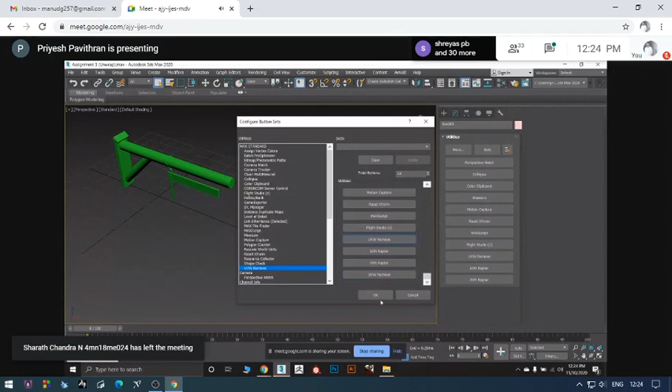I will remove this one. Imagine I'm going to add one more, which is 12. So I got an additional column here, under the Max standard variant, UVW remove. I have put it here also, and here also, like that. For the empty space, UVW remove, I have kept it here. Pressed OK, now it came here.

So again, to remove material, I'll show you. The material got applied, okay. Go to UVW remove materials. Now you can change your color from here. So this is how you clear the materials.

Any more doubts? Any more doubts in the unwrapping part, or any scene converting, or anything? You can ask. Okay, Nandan. So everybody got it, I guess. Yes, that's great.

So that will be your assignment for tomorrow. Tomorrow you guys have to send me, not the screenshot -- you guys have to send me the max file. Through the max file only I can verify your assignments. So keep practicing, watch the video, and follow the same steps.